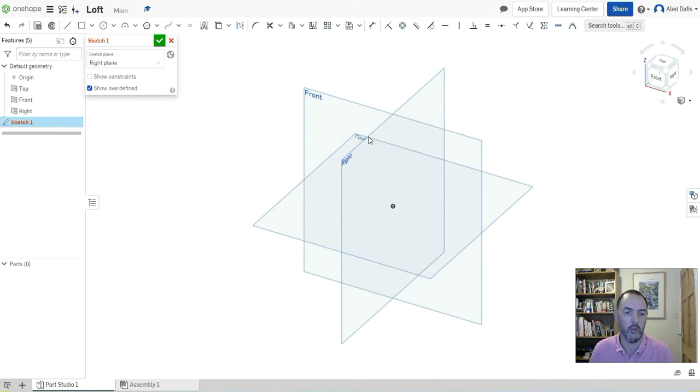And I'm going to pick the work plane, look straight on at this right work plane, and I'm going to pick the square tool. But this time I'm going to drop down and I'm going to pick a center point rectangle because I want my center point to be a reference for my next feature. So I'm going to make this square, and I'm going to dimension it as I've done before using the dimension tool.

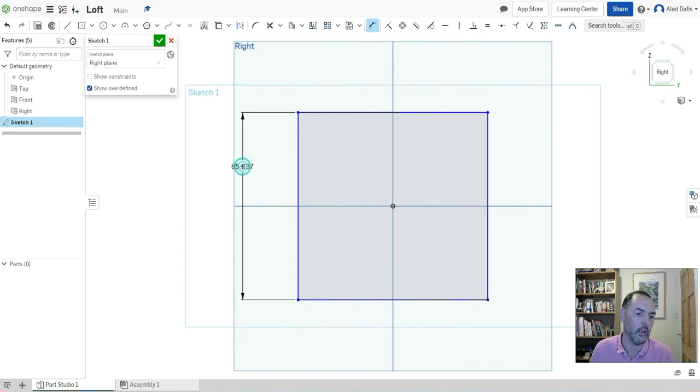Click, drag, and I'm going to give that a dimension of 100, and just to make this a little bit more interesting, I'm going to make that a rectangle, so I'm going to make that 75. Notice, being a center point rectangle, the center didn't move and the rectangle is centered about that center point. Okay, so I'm happy with that. That's a 100 by 75 rectangle. I'm going to click the big green tick.

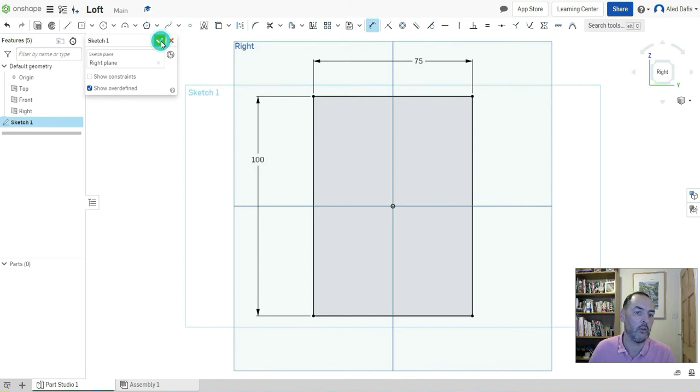Now then, we can see that my sketch is there. Just to clean this up a little bit, I'm going to get rid of the other work planes for now. So I'm going to get rid of this top work plane, and I'm going to get rid of this front work plane. So what I've drawn is a rectangle on the right work plane. So what I want now is a work plane above that, and we use the plane tool here. So if I click on plane

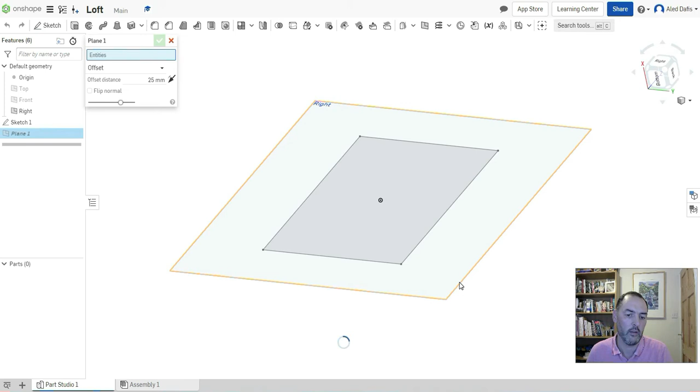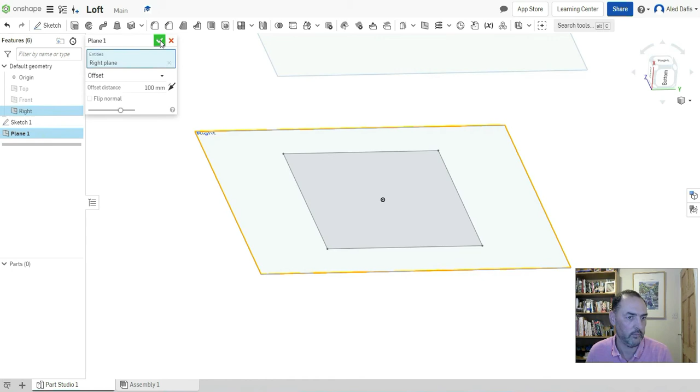and click on this work plane, by default Onshape puts a plane in 25 millimeters above. Can you see there? There's a work plane 25 millimeters apart. But I'm actually going to make this using a dimension here, offset dimension 100. And that moves this work plane further up, and I'll just zoom out a little bit so we can see there. So I'm happy with that, a work plane above my initial work plane by 100 millimeters. Big green tick. And now I'm going to draw a new sketch on this top work plane.

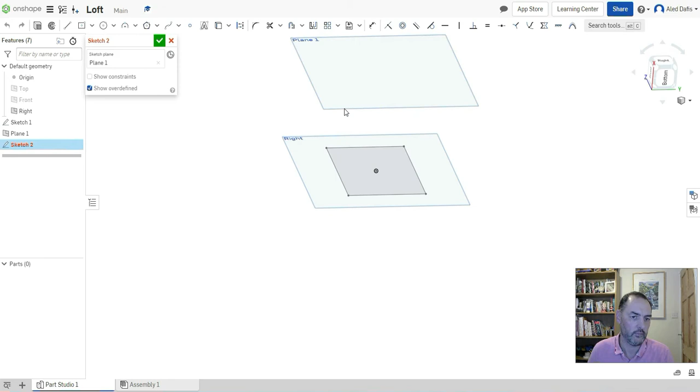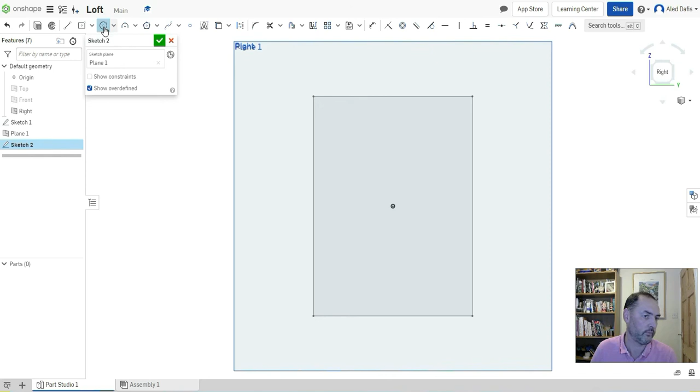I drag that down to the center of the screen so we can see what we're doing. There we are, and zoom out a little bit. There we are. So I'm going to draw on this work plane, and if I look directly from above onto it, I can see the work plane below where I initially drew my rectangle. So I'm actually drawing above that. Now I'm going to put a circle on there, using the center point as my reference again.

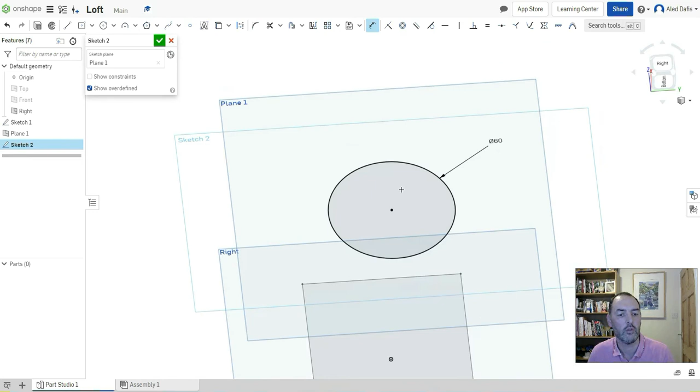Drag out and give this a dimension. I'm going to dimension this 60 millimeters. So if I just swivel again, I can see now that I have two work planes, two sketches, 100 millimeters apart, one being a rectangle and one being a circle. I'm happy with that. Big green tick.

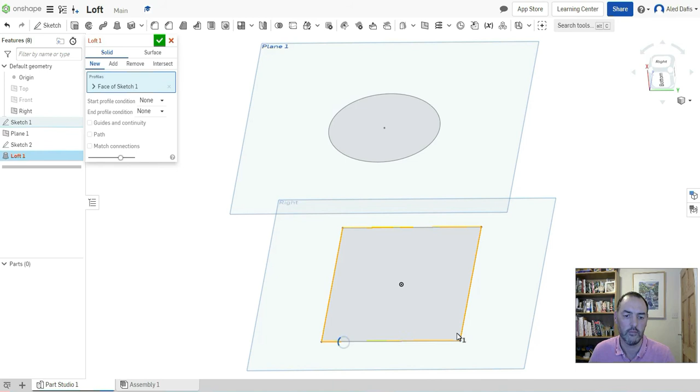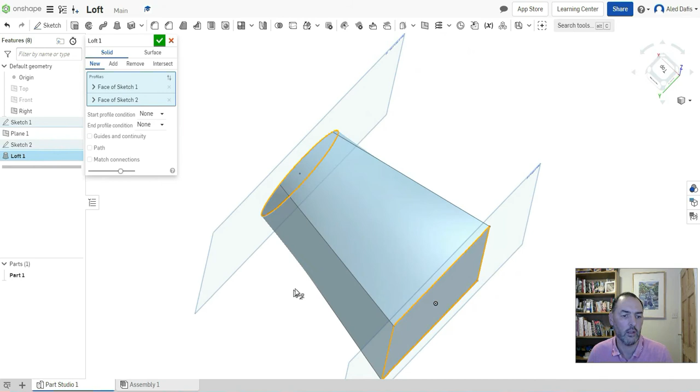And I'm going to select this Loft tool. And Loft allows us to create a body that moves seamlessly between two sketches. So I'm going to pick this bottom profile, and then I'm going to pick this circle, my second sketch. Like that. And we can see that Onshape has produced a preview that shows the rectangle moving seamlessly into a circle at the top.

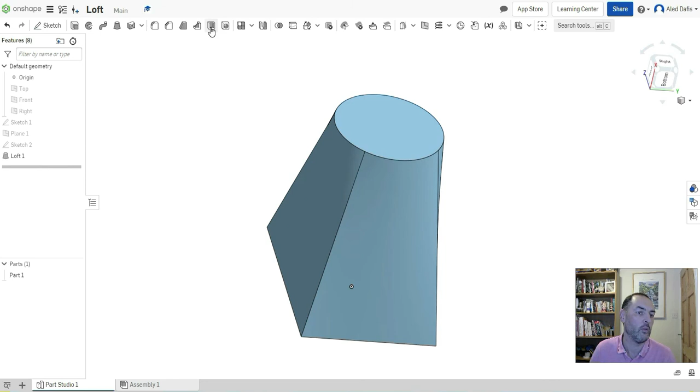I can select that. I'm just going to get rid of my planes now, hide them using the eyeball as we've done in the past on the left hand side here. And there we are, that's my square to round or rectangle to round profile lofted from one to the other. I can do the same again. I can shell, take away the top, and that gives me a container, or even I could turn it around the other way and I could take away the bottom face as well.

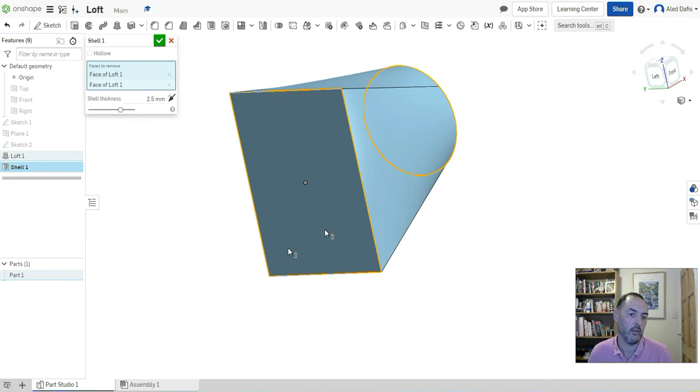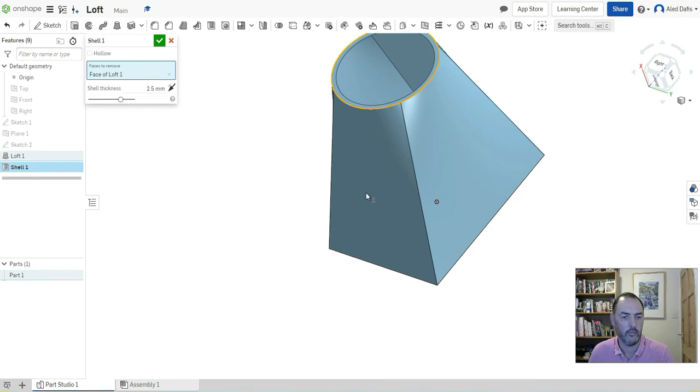And then that would allow us to move, say, maybe from a rectangular pipe to a circular pipe, square to round feature. But I'm actually going to take that bottom face and put that back on, so delete that feature. So that's it there. I'm going to accept that.

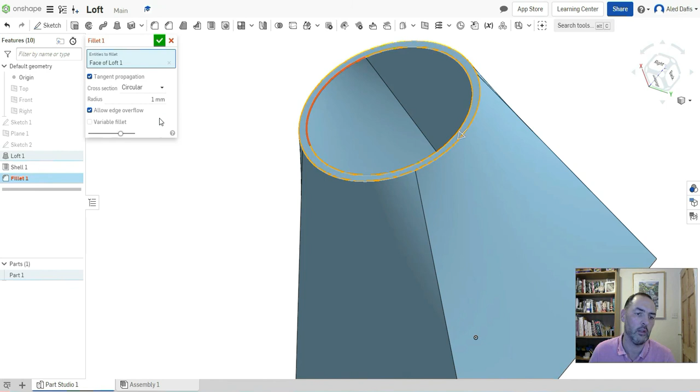And like I did with the vase, I'm going to put a small fillet on this top face. So I've just selected the face there, and that will put a fillet on both sides of that face. Again, give it a 1mm radius and accept that. There we are. That's a very simple loft. Okay, so that's my first quick demo.